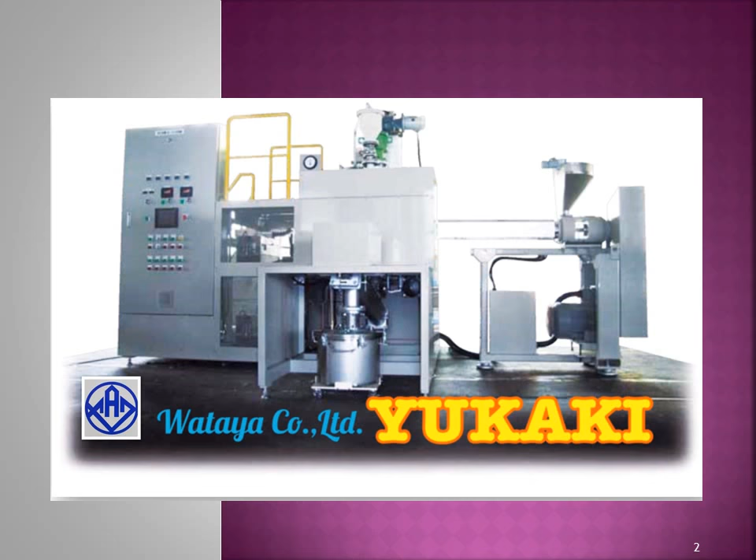Yukaki technology for international friendship and environment protection. Japanese advanced environmental protection technology. Plastic vaporized and refined system using high frequency.

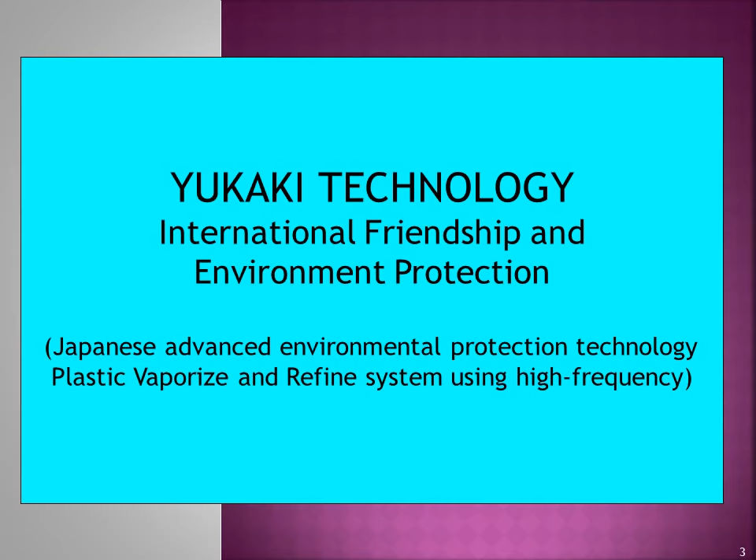The aim of the material: 1. Make the friendship bridge between Japan and the Philippines. 2. Make environmental protection sites and equipment locally. 3. Create local employment using environmental business. 4. Save the cost of government services and make money by recycled oil. 5. Reduce the landfill, burning, and insanitary conditions in the local area.

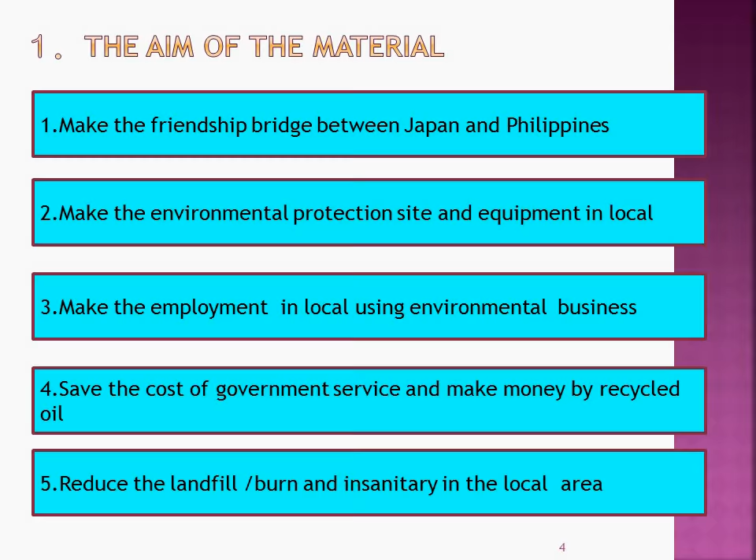Technology of plastic recycling. Social background: contribution to the complete recycling society. The process of waste material is becoming a global issue these days, and recycling is an important challenge from the resource and energy point of view. Plastic, made from limited resources such as petroleum, is an essential raw material in our lives. The recycling technology of plastics is also our matter of concern.

Material recycling and chemical recycling have become common as recycling technologies for plastic material, which are methods of recycling plastic into plastic products and chemical industrial raw material. Furthermore, people are starting to realize the importance of thermal recycling, which allows plastics to be used as oil and coal.

The volume of produced plastic and recycled plastic: nowadays, 12,700,000 tons of plastics are produced and 9,460,000 tons of waste plastics are created in Japan, according to research from 2010. Meanwhile, 7,230,000 tons, that is 77% of plastics, are recycled, and 2,210,000 tons are used for reclamation or simply discarded. Technology for making good use of waste plastic is socially and economically needed in the near future.

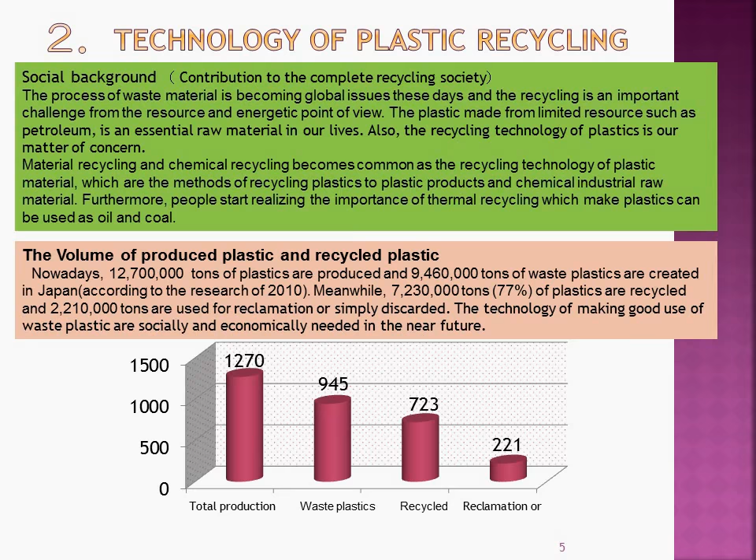Recycle of plastics: in 1995, the Packaging and Packaging Waste Law was enacted. On April 1, 2001, paper boxes, plastics, and other waste started to be considered for regulations on material recycling. This law was intended for small and medium-sized companies as well as large enterprises. Under such circumstances, oil production equipment Yukaki was designed to convert waste plastic into reforming oil without having environmental quality deteriorated, such as generation of dioxins created by incineration and disposal of waste at landfill sites.

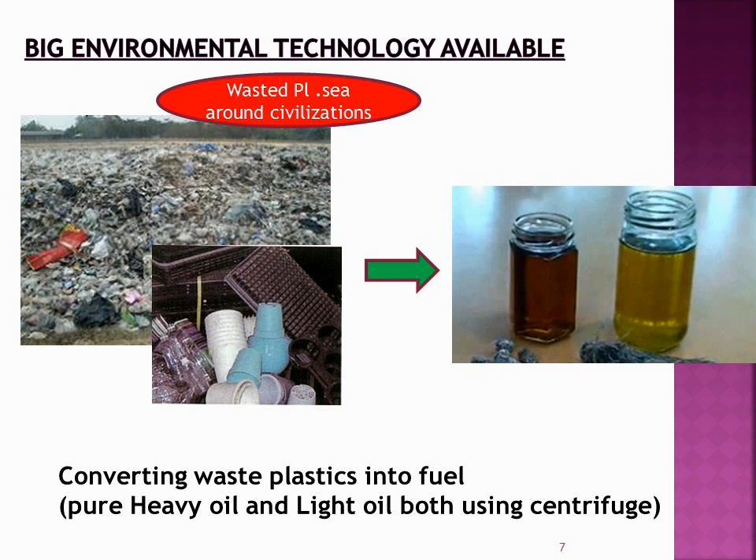Yukaki Corporate Philosophy: there are many such equipment in the world, but why haven't they expanded so far? No need for large space for installation. So far, liquefaction systems were developed to meet the requirements of huge petrochemical enterprises.

The system was integrated as part of a total system in large petrochemical machines installed at their plants, and it was not easy for small companies or public organizations to obtain such equipment, given limited installation space and budget. Yukaki equipment was developed and designed under a new concept: that one must consider treating his waste on his own initiative. This philosophy made it possible to introduce such a compact system and equipment.

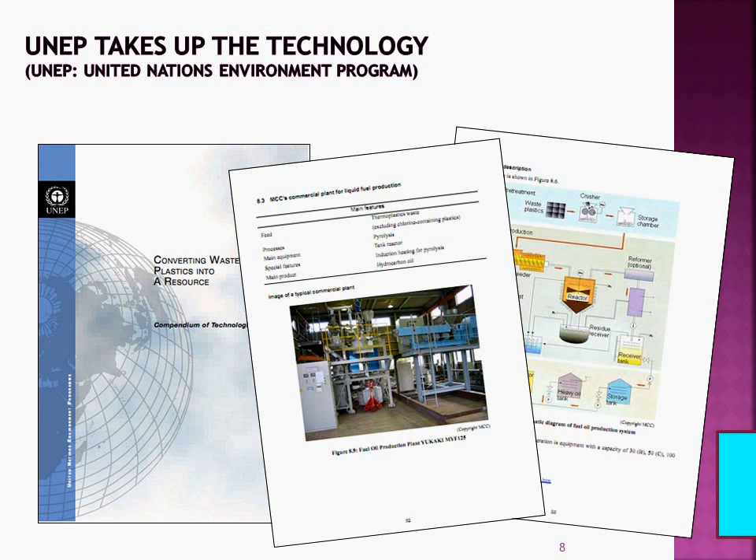As a matter of course, the small induction heating type of Yukaki equipment is the exact one that is inevitable to pursue zero emission in the 21st century for a beautiful earth.

The technology of plastic recycling. Many methods for waste plastic recycling, based on long-term technology development, are being put to practical use, which can mainly be divided into three categories. Material recycling: turn to raw material, turn to product, that is mechanical recycling.

Chemical recycling, turn to raw material and monomer, turn to blast furnace reducing agent, turn to coke oven chemical raw materials, turn to gas or oil.

This is feedstock recycling. Thermal recycling, energy recovery: turn to cement raw material, waste power generation, turn to refuse paper and plastic fuel, turn to refuse derived fuel. This is the energy recovery.

There are mainly three typical plastic recycling methods listed above. It is important to choose the one at low cost and that can reduce load for the environment based on the conditions of waste plastics.

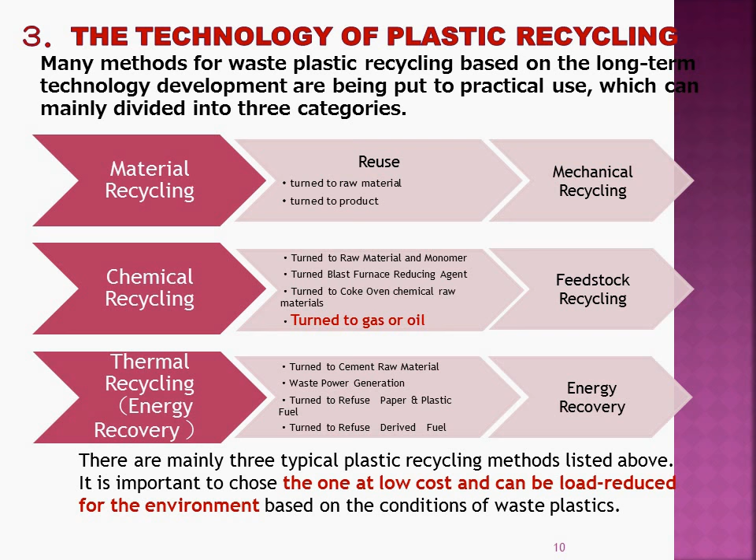What are the methods at low cost and that can reduce load for the environment? There are four factors to determine the best recycling way for waste plastics, and it needs to be optimized, including transportation connecting all factors. The best way should be chosen based on every condition because every technology has pros and cons.

Secondary, to clarify the features of plastic liquidation, I will show the pros of plastic liquidation using the comparison between chemical recycling and others, like thermal and material recycling.

Comparison with material recycling. Ultraviolet rays, or UV, and bacteria deteriorate plastics. The deteriorated plastics cannot be recycled materially. However, it can be recycled chemically.

Thermal recycling requires large-scale equipment and high initial investment. It requires a cement plant to heat up. Even if it is recycled to refuse paper and plastic fuel, common machinery cannot use it as fuel, and it requires a special fuel system to do so. This system is now not common in use.

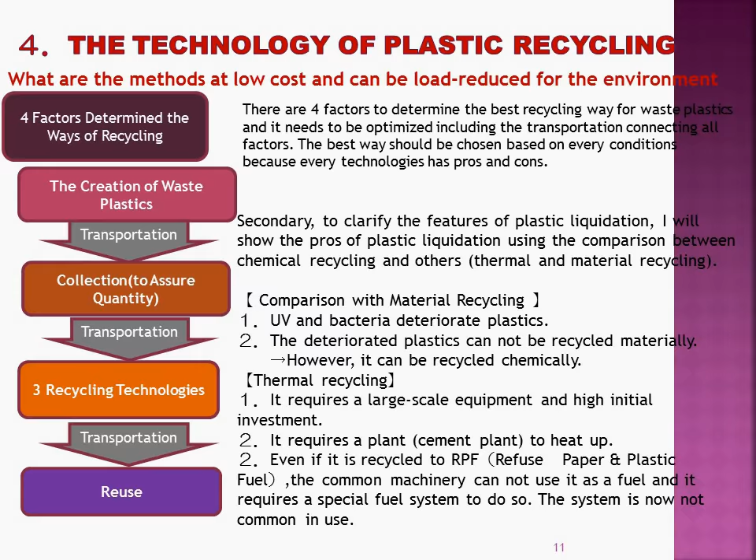The features of our technology, with its great process ability and economy, the Yukaki MS series brings a revolution to the field of waste plastics recycling. Low price and compact: compact type without complex functions. Low cost, only for the equipment of plastic liquidation itself.

High frequency induction heating system. Improvement of stability because of the high frequency induction heating system, which makes no need to use fire.

Continuous operation. Thanks to the extruder in the melting section, it leads to better use to consequently input waste plastics compared to traditional batch processing equipment. Low running cost: succeed in cutting down running costs since the produced oil can be used as fuel.

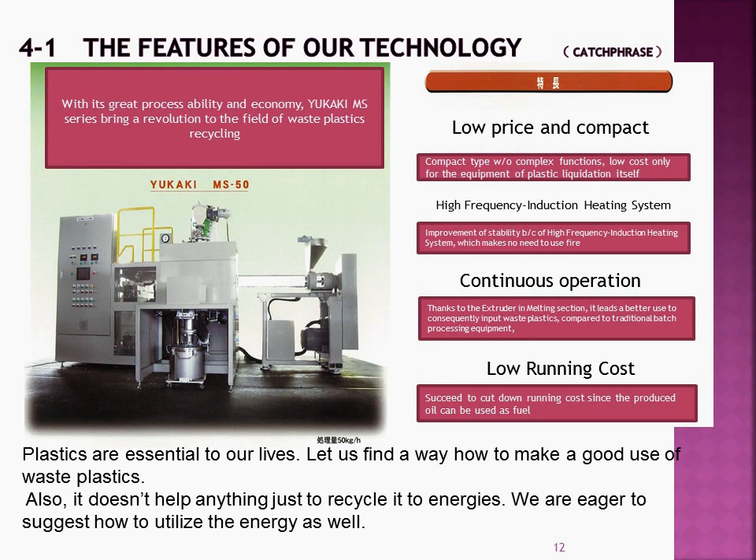Plastics are essential to our lives. Let us find a way to make good use of waste plastics. Also, it doesn't help anything just to recycle it to energies. We are eager to suggest how to utilize the energy as well.

Yukaki equipment features. Productivity: with the sharing of liquefaction energy by reduced dissolution and pyrolysis, equipment assures high capacity of treatment. Auto-feeder of material in concert with the pyrolysis speed and treatment of residue at the same time reserves the consecutive process. As the method of heating for the pyrolysis vessel is frequency current, delicate control of temperature can be done.

Operation: progress of operation in the system is visible with graphic display and monitor. Setting of temperature for the pyrolysis vessel can be changed at random during operation. Heating is suspended automatically when an abnormal situation happens. Residue is separated and taken out under powder condition for easy work.

Safety: constant monitoring of temperature and pressure prevents error in operation. Prevention of human error by automatic seal of gas getting into vessel. Automatic suspension of heating and seal of gas when abnormal situation happens. Secure safety by explosion-proof specs for composition and circuit, for cost saving.

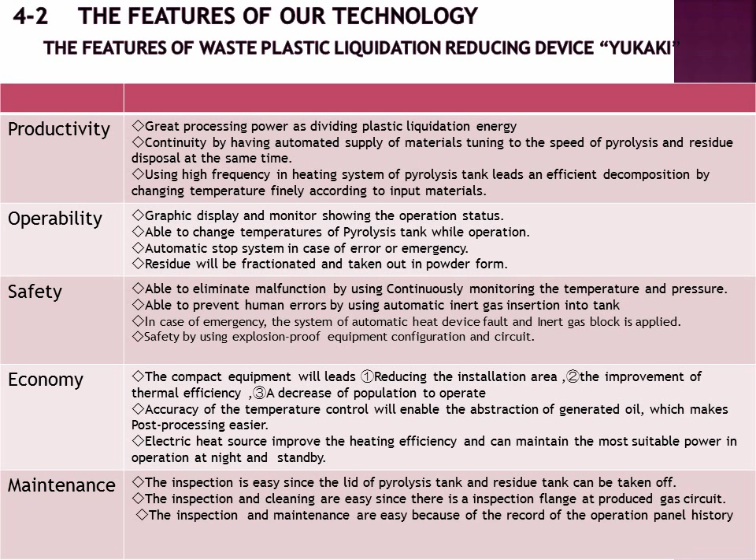Maintenance: easy removal of cover for vessels is available for easy inspection. Gas inspection lamp and flange in circuit make easy inspection and cleaning. Panel keeps history of operation for easy inspection and maintenance.

Oil production equipment, Yukaki system. Waste plastics are broken into pieces less than 10 millimeters in size and thrown into the dissolution vessel. Then, by giving heat, dissolved material is supplied to the pyrolysis vessel. Vaporized oil coming from dry distillation is cooled to a liquid. This is a system to produce reforming oil which corresponds to type A heavy oil.

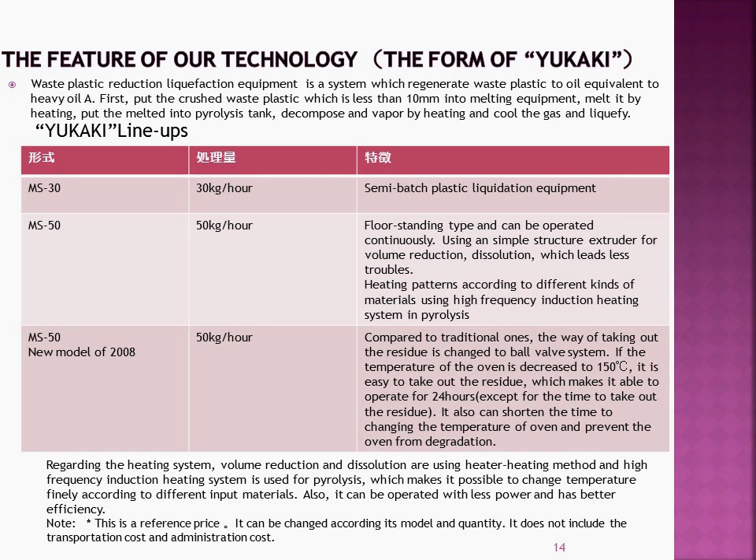The features of our technology. This is just an example of the result of a liquidation experiment. The Yukaki machine can only liquefy 3P.

PS polystyrene, PP polypropylene, and PE polyethylene, and some of the ABS resin. The chart below is the result of an experiment of liquidation upon request. Materials other than those below are out of warranty. The chart below is only for your information.

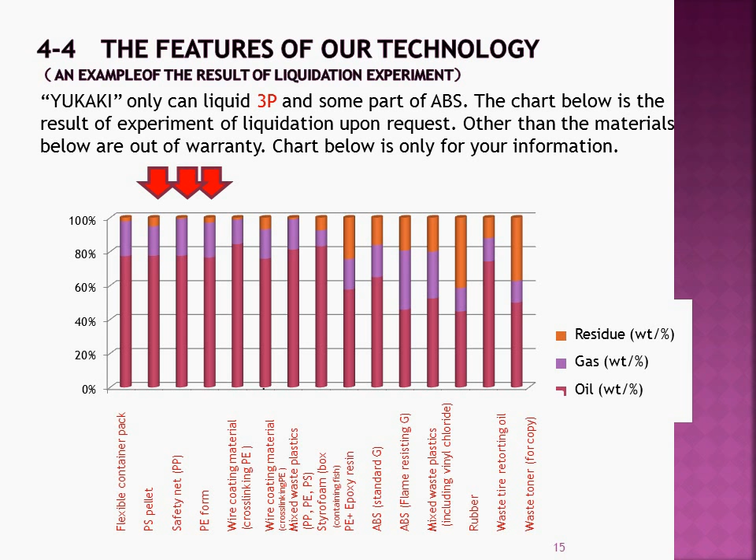Introduction examples: verification and introduction results. In 2008, an Industrial Waste Disposal Operator purchased the latest model of Yukaki, and they used the reduced oil as their fuel - Yukaki MS-50. It is easier to take out the residue than the old one.

In 2010, a Plastic Injection Molding Company in Gifu purchased the original model of Yukaki MS-30 to generate electric power by liquidation of their discharged plastics, which is the start for Yukaki to be operated in corporations.

They are purchasing bottle caps from Nakatsugawa City and mixing it with their waste plastics. They reduce it to fuel for the generators, which supply power to their injection molding machine, air conditioners for plants and offices, and some lights.

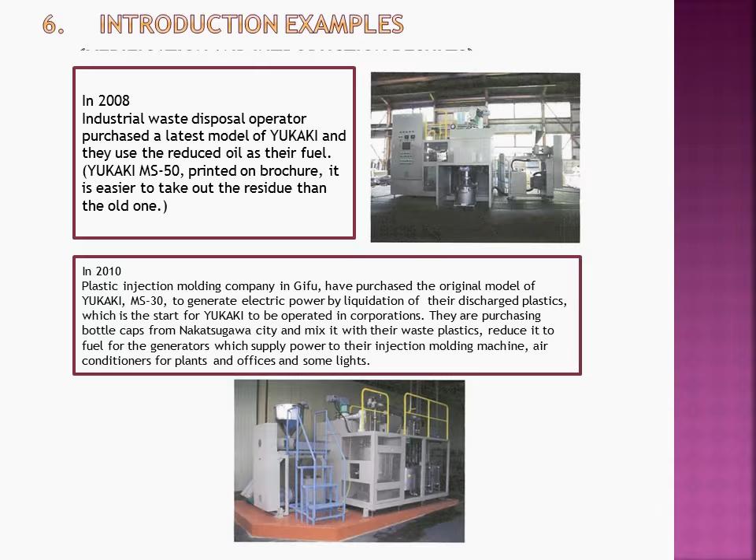Laws and regulations: Standard to generate hydrocarbon oil and carbide. The Law Enforcement Regulation, Article 7, Item 1, regarding the disposal of waste and cleaning.

Standard for disposal: structure of not burning the waste in the pyrolysis tank by preventing air from going into the pyrolysis tank. Our countermeasure: the pyrolysis tank is sealed, and the waste in the pyrolysis tank shall not be burned by doing N2 purge in the first stage.

Standard disposal 2: able to correctly maintain the temperature and pressure needed for pyrolysis of industrial waste, for pressure only in case of pressurization, same as number 3.

Our countermeasure 2: maintain the constant temperature needed for pyrolysis by using high-frequency induction heating, and directly measure the temperature of the pyrolysis tank and automatically adjust the output of high-frequency induction heating.

This equipment is never pressurized; the device is operated at atmospheric pressure. However, it has a safety valve and exhaust blower.

Structure to be able to measure the temperature and pressure on a regular basis. Our countermeasure: it can measure the temperature of the pyrolysis tank, inside of the tank, and other parts with a thermocouple and show it on the display. It also shows the pressure by using a compound gauge.

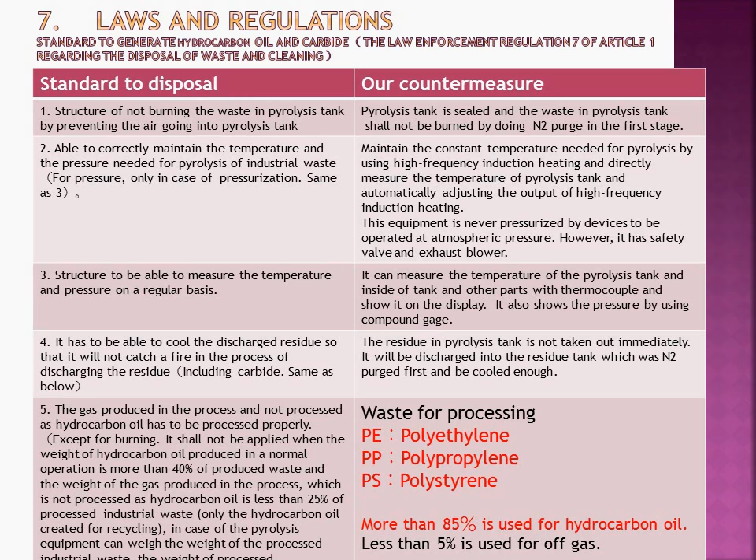The data of analysis: the analysis of equipment by public organization. We can provide the following materials and data as a countermeasure for legislations of other countries. Need to decide whether the fee should be included to know how, or counted as additional cost.

1. The analysis of equipment by public organization. 2. Component analysis of exhaust gas, Air Pollution Control Act. 3. Hazardous substances analysis of residual component, the Soil Contamination Countermeasures Act.